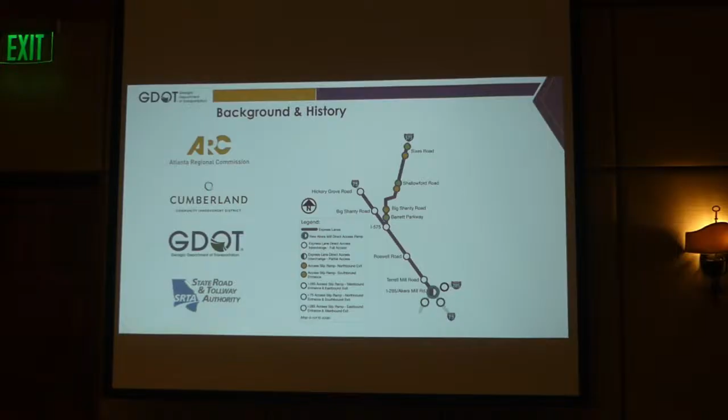This facility also included 2 express lanes on the west side of the existing lanes along I-75 between I-285 and I-575. And although the Northwest Corridor provided an alternative paid access route along the north side of Atlanta, there was no connection to the Cumberland CID area. And the Cumberland CID, as many of you probably know, serves as a major commercial activity center. It's one of the largest employment centers in the state, and it's home to major entertainment venues such as the Atlanta Braves Stadium and mixed-use area, as well as Cumberland Mall.

And so this connection was something that was desired, and so the Atlanta Regional Commission, Cumberland CID, GDOT, SRTA, and others pooled funds together to fund the Akers Mill project, which started in October of 2021. The project was completed as a design bid build through the Office of Program Delivery with GDOT District 7 leading the charge of overseeing construction throughout the duration of the project.

In this slide, I'm going to provide a little bit more info on our reversible express lane system, which, as you know, are toll lanes where the direction of traffic can be flipped to help manage congestion and increase capacity. While the direction of travel is typically set based on peak commuting hours, the direction can also be changed to assist with traffic flow for major events, incidents, or hurricane evacuations to ensure the lanes flow in the direction with the greatest travel demand. So lane reversals are performed by our TMC operators using our ATMS software, as well as with our HERO operators supporting from the field.

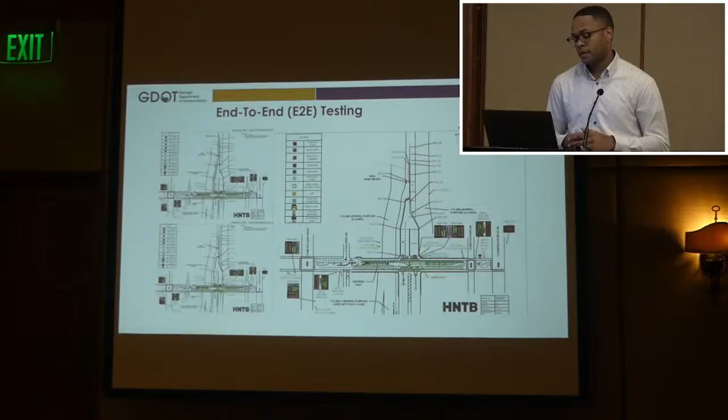All right, so kind of transitioning, I'll be handing it back to Christina in a little bit. But with this project being such an impact to the public, we wanted to make sure we were on the forefront of communications and outreach. So HNTB has a communications team that works on a lot of P3 and MMIP projects. So we employed their skill set, and we had them develop some FAQ sheets. We had them develop some social media blasts and some graphics. And we made the news, which I'll show in a subsequent slide here in a minute. Hopefully this will play.

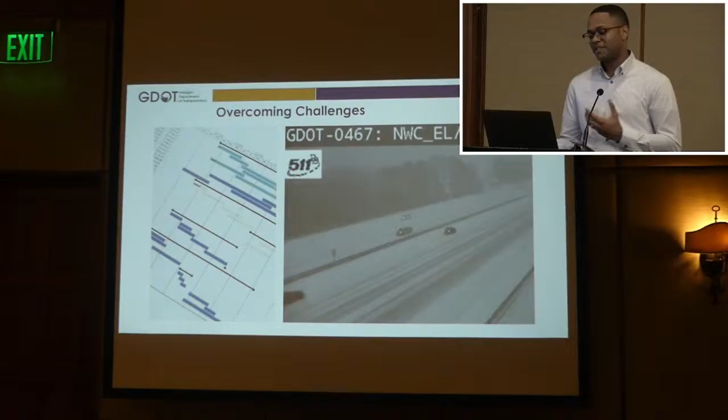This next screenshot is a screenshot from a CCTV stream. We were actually scheduled to do end-to-end testing this day. I thought we could do it. Personally, I thought we could push forward, but nobody agreed with me, and we had to cancel end-to-end testing. No, I'm just kidding.

Obviously, we wanted to make sure everybody was safe. So we did cancel end-to-end testing due to a snow event. And so we ended up having to pivot our schedule because end-to-end testing was critical before opening the ramp to the public. So we had some snow days, and we had to pivot a little bit to make sure everything was done safely.

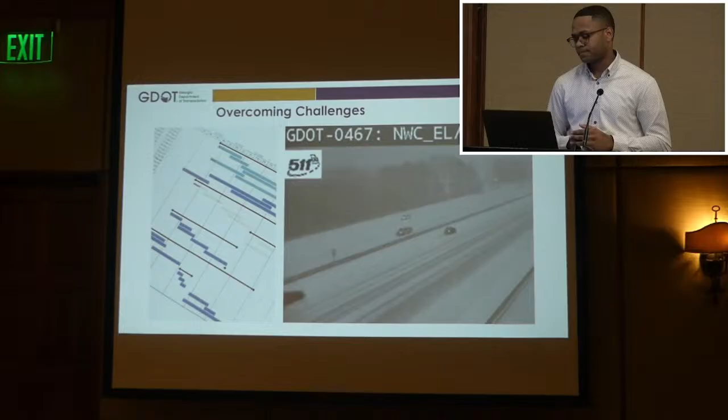So as I go to the next slide, the saying, "It's a wrap," well, we say it's a ramp. I didn't know if that would be funny or not, so tough crowd, I guess, but all good. But it's a ramp. That's what it boiled down to. We worked tirelessly for several months, and there were even folks that predated my involvement on this project that worked for years and years to realize this project.

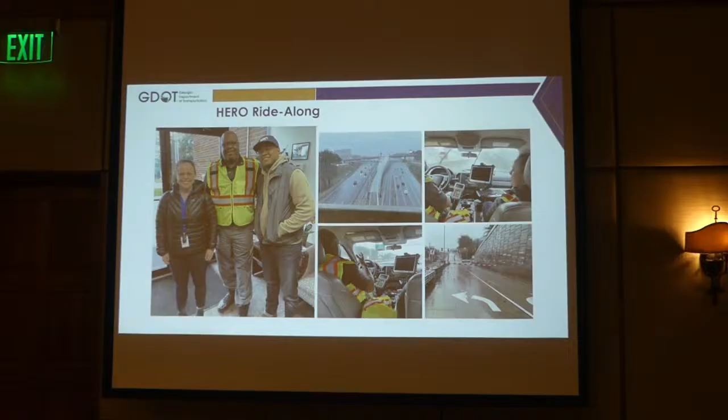And then when we started the transition, everything went smoothly, so there was no cranking gates or anything like that in the field, and so it was a very smooth transition. We were happy for that, and we were able to see the Northwest Corridor Express Lane southbound to northbound transition in action from the Hero driver's perspective.

Is this going to come up? Okay. Well, we did have a dashboard to show you. Can we get it? Okay.

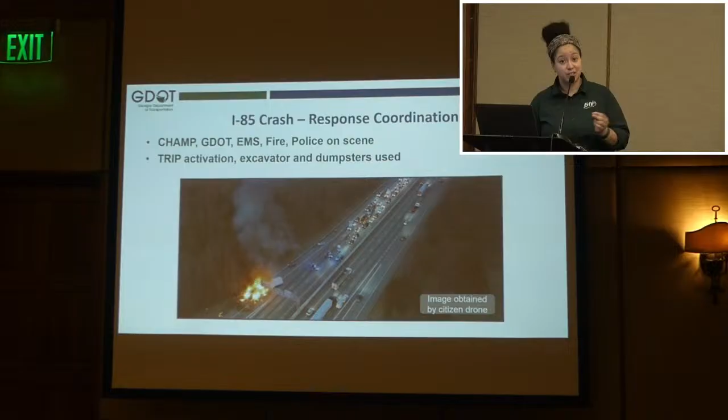This right here is an image actually obtained from a citizen drone. So someone saw some smoke, decided to fly up a drone and captured this image. And just with a quick caption, we're going to show that we had CHAMP, GDOT, emergency medical services, as well as our fire trucks and our police on scene. There was also a TRIP activation, and an excavator and dumpsters were used.

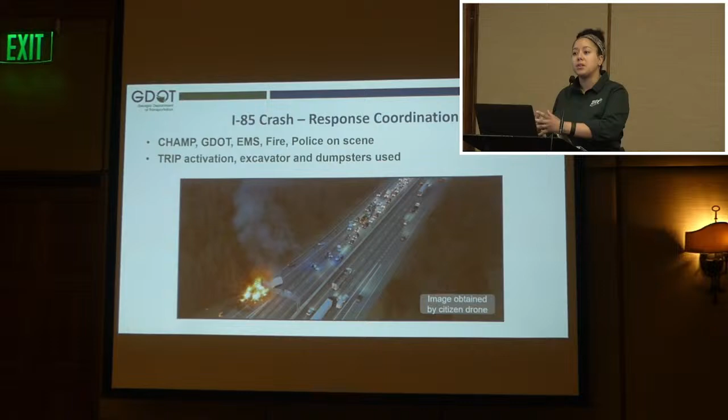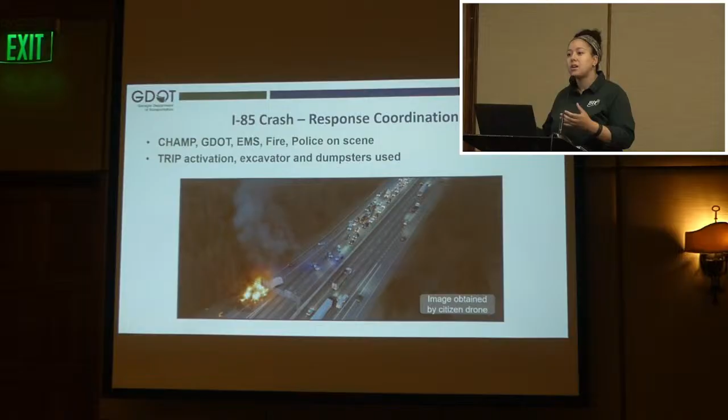Now, the interesting thing about this wasn't the tractor-trailer fire, because we know that that typically happens. It was the sign gantry that was burning underneath it. So once responders arrived on scene and they saw the fire burning, the question was, is this sign gantry stable? Is it safe for vehicles to pass through it? And that's ultimately what caused a bit of our communication snafu. You know, how are we going to get the sign gantry down?

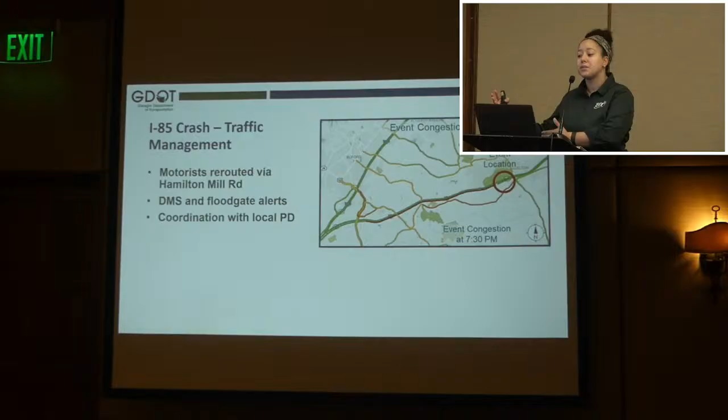As you guys can see, this is an image from RITIS. We're using our trend maps, and the event was captured at 7:30 p.m., so right as those lanes were being closed. Another thing that we gather is our RITIS crash performance metrics. Now for this, the roadway is closed, so it's kind of tricky. Whenever you have a roadway that's closed, only 2 or 3 vehicles can go through, so it might say something incredibly high if somebody's at the scene.

So sometimes we can see irregularities with RITIS, but overall, from that 6 to 8 period, it would take you over 4 hours to get through that area. But the roads were closed for an extended amount of time because we had such an intense situation. So I wanted to just make sure that I showed that. And that was our dog food incident. Now let's move on to our next crash.

We had a very interesting emergency landing of a small plane. Now, here's the story. We had a pilot in training that was flying up for the very first time, had their instructor in the back seat. They're doing their loops, they're cruising, having a good time. All of a sudden, their engine goes out and they're panicking. And they're like, what do I do? So the instructor behind him is like, calm down, don't panic, don't panic. Try and radio out to a radio tower.

No response. Said, all right, well, this is gonna be an interesting learning experience. We're gonna have to land this plane. And that's what they did. So on the way down, this plane clips into a tractor trailer. The wing gets stuck. And then they have to slow down so that they can unjam from the tractor trailer. And then whoosh, they land right on 985. I'm so excited. They land right on 985. No injuries, just some complaints of sore knees. But now we have a problem. We've got a plane on the highway.

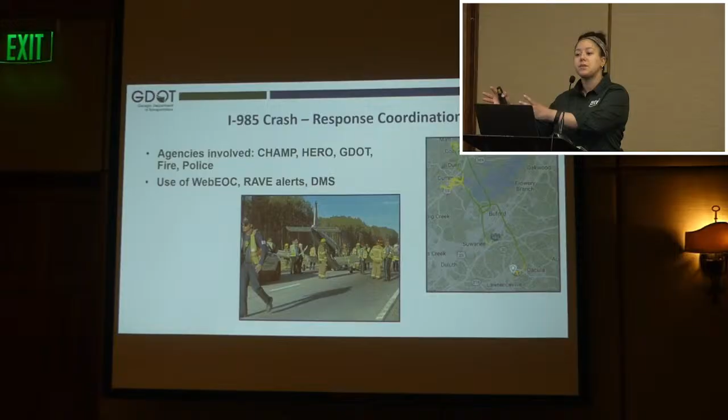We've got a couple of images from response. We had CHAMP and HERO working together. CHAMP provided advanced warning. So imagine that you're coming up to the crash, you see a CHAMP vehicle that says, hey, got a big crash, all lanes blocked, might want a detour. That's a great way that CHAMP helps, just really smooth out that traffic. We also used WebEOC. We used our Rave alerts, and we used our dynamic message signs to let everybody know, hey, there's a pretty big event going on.

In that right corner, they were actually able to share the flight path with us from the plane. So you can see where they started and where they ended. So they took a couple of loops, and you can see, I wouldn't say the panic. You can't see panic, but I was imagining a little bit of panic. I would be panicked in that situation. I know you guys would too.

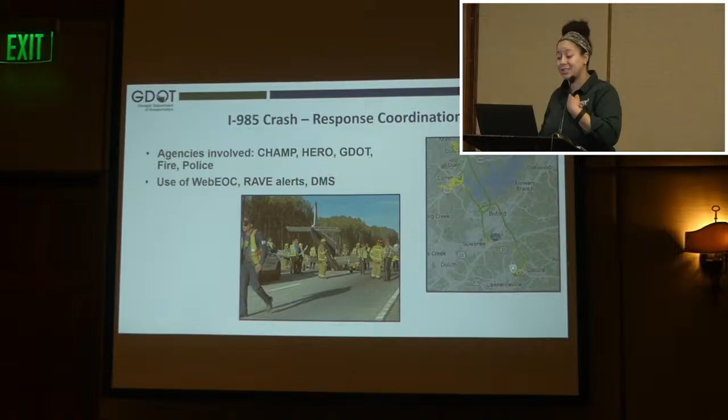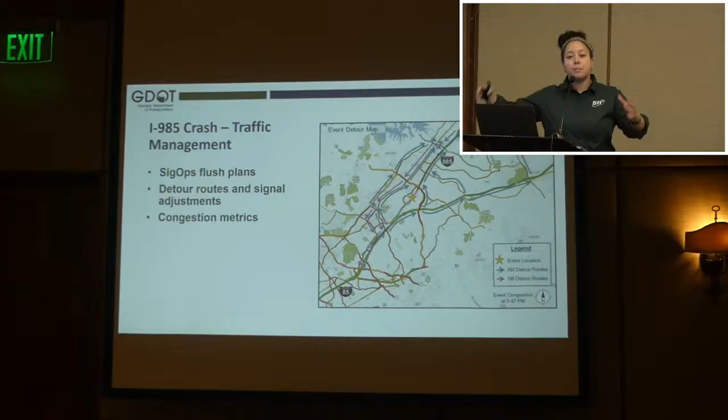All right, this is a very fun diagram that I created as we had to do detour routes for both northbound and southbound routes, and we cooperated with SIGOPS. We're able to say, hey guys, we got a little bit of a snafu going on here. You guys help us out. We're able to detour those routes and get signal adjustments so that we can get people to where they needed to go. We also provided some congestion metrics.

As we can see on RITIS, because there's so few vehicles going through those lanes, we don't have the most accurate data, but travel times were definitely a lot higher than they should have been. One thing that we use RITIS for is our delay costs. So imagine that everybody that's in traffic at that time gets assigned a dollar value amount to their time. Whenever we take their delay and time, we can make an estimate of how many thousands of dollars an incident would cause as a holdup. Not saying that this many people had to hold up, but overall 10,000 person hours of delay with everybody just coming through since 985, and the area is such a big area and a 6.2 mile bottleneck.

So I reviewed the crashes. Let's go into those after action reviews. Oh, do you mind if I open up that PDF? All right. Where do we have it at? Boom, thank you so much.

I wanted to share with you guys just an overview of what our after action report looks like. So we're able to see that we've got just our general information. We always start with a write-up of the area, our event statistics. So we'll provide just a review. And in the after action review meetings, I actually read this out to our stakeholders, police or fire, because the after action review meeting may take place a week or so after the original event, it's good to just catch them up on what happened.

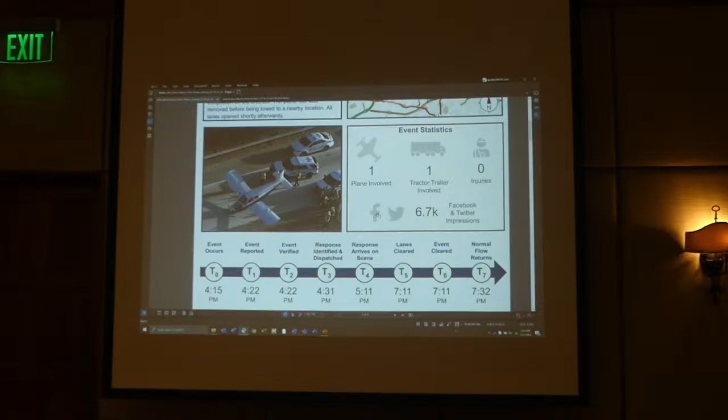Again, we've got our FHWA timeline, and then over here we've got sort of an event details of what took place. So we take our event details from ATMS and we kind of type them up into a more digestible format so that first responders or people that are on the scene are interested and they can find out that information. But it also helps us kind of see, where did we have any barriers in communication? Where could we improve? So always good to provide that.

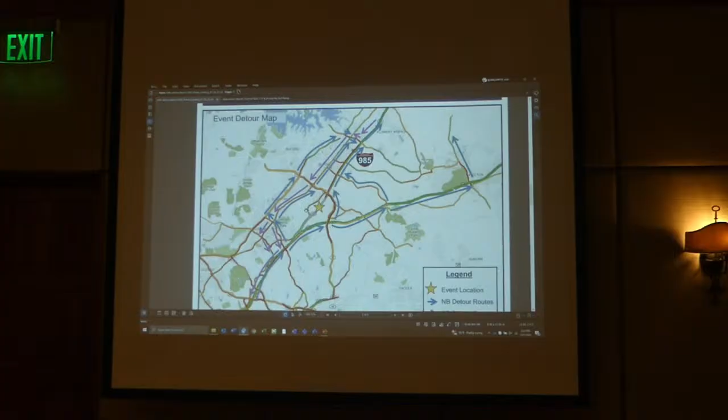Going into our SIGOPS involvement, this very nice colorful map. And we went into the traffic signals that were managed. So we had State Route 20, Buford Drive, State Route 347, Friendship Road, State Route 13, Buford Highway, State Route 211, Georgia Highway 211. Just a good amount of signals.

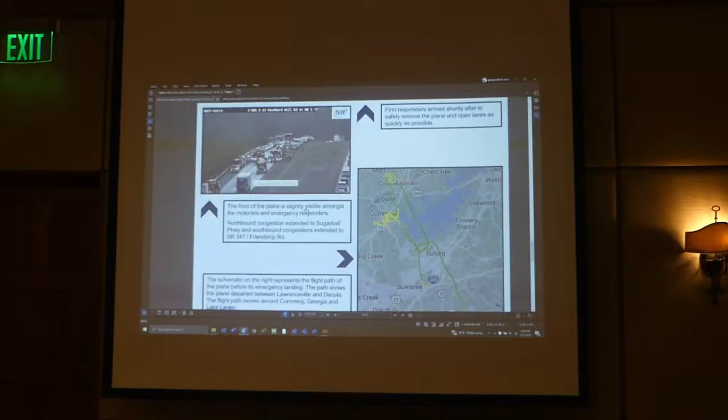And then for this event, we had so many additional details, which I'm always here for the additional images, because I feel like it tells such a great story. So we've got some images from the 511 CCTVs, we've got that flight pattern, and then our performance results as we go into the bottom. And we can see our bottleneck as well as our user delay cost.

So on an average Tuesday, it would be about $64,000 of delay. On the day of the event, it was about twice as many, so $118,000 of delay. And again, that's not saying how much it costs, but if you put a dollar amount to everybody that was in traffic.

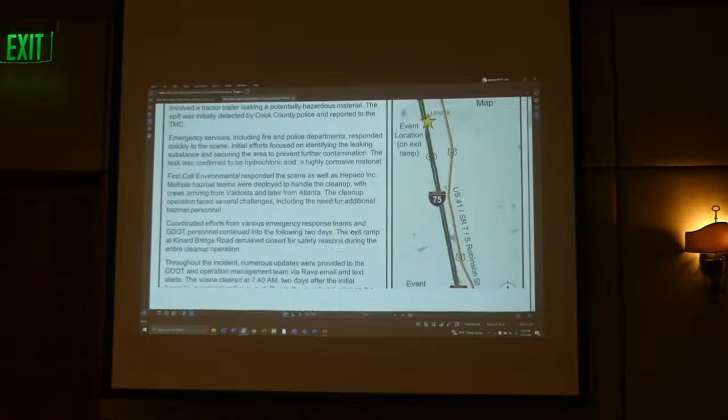Nowadays, our after-action reports have taken a little bit of a facelift, so I wanted to share with you guys this one, a hazmat spill. We follow the same format where we provide the map and overall review of everything. For this, it was one tractor trailer. We had a lot of hazardous materials spilled, and it was hydrochloric acid. We provide our notification timeline. This spanned over several days.

We had just as much detail as we can get. One of the things that was critical for this after-action review was that, hey, the environmental company that we called was a very long distance away from where the incident was, 213 miles, actually, from the area. And then for this one, we provided an additional timeline. Hey, hazmat took a while to get on scene.

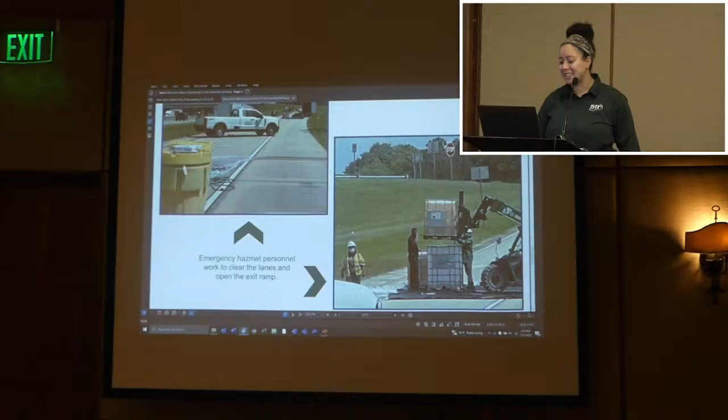And then for our additional event images, we had some images of the hazardous materials that were in the tractor trailer. Now in this specific incident, there were pallets of a liquid that when leaked out, they vaporized and turned into an airborne kind of irritant. So that was interesting. And we can see, we're clearly missing a little bit of PPE from this person over here standing right next to it, as you guys can see. But this is what I wanted to show you guys.

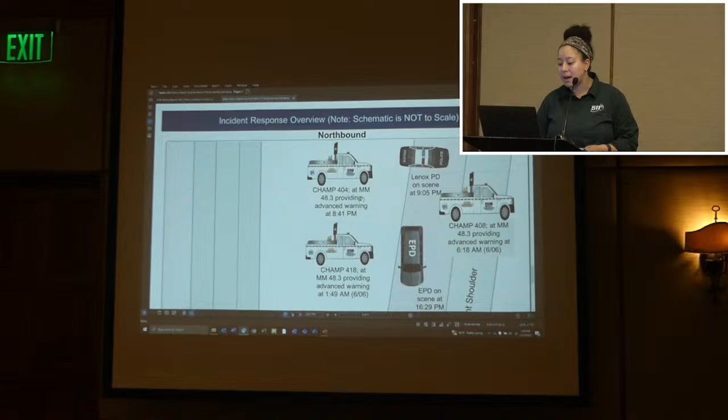We have a schematic that we started adding just to kind of detail how we would like for these events to be shown. So we've got on the right shoulder our tractor trailer. We can also see EMA and EPD on scene, as well as our local police, and we've got several CHAMP units on scene, as well as our hazmat materials. I think having a visual representation of who's on scene is a great addition to our after-action reports and really helps put a picture to words of who was on scene, as well as timestamps. Now with that, I will go ahead and get back into our lessons learned.

All right, communication and event management. Christina said it best. Collaboration is key and no such thing as over-communicating. Importance is placed on our early alerts, so RAVE and Web EOC. Also having those real-time updates to stakeholders, because as the event's going on, they're likely getting a lot of questions too. Making sure that we coordinate across jurisdictions is one of the biggest things that we drive through in our after-action reports, especially with local police. So we try and educate them on how this is the best way to communicate.

Did we hit a sign, or was it a sign gantry? Details like that. Also, utilizing CHAMP and HERO for that rapid response. Use of TRIP and heavy equipment to clear the scene quicker. Fuel offloading and aircraft towing. And then, again, collaboration with those local agencies.

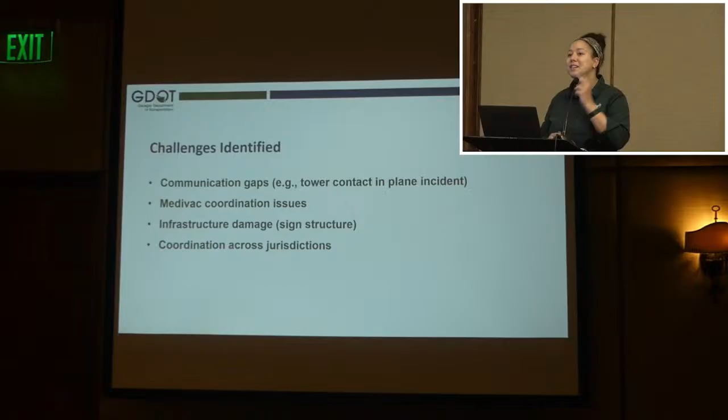Some of our challenges that we have is communication gaps, as we mentioned. Medevac coordination issues. Sometimes life flight, to save people's lives, they need to land a plane or a helicopter on the roadway, and they need the lanes to be clear enough so that they can land. Infrastructure damage and the extent, as well as just, again, coordination across jurisdictions. I put it in here twice because I wanted to drive it through. And our overall summary, our after-action reports are one of our critical tools for continuous improvement.

Scalability to other regions and incident types is critical. It doesn't matter if it's a small incident or a big one. The more that we have these conversations, the better we can get these lanes open quicker. And then just integration with smart traffic systems. As we start to have new technologies, we're working our best to use them, and again, to keep our roadways clear and keep traffic moving.

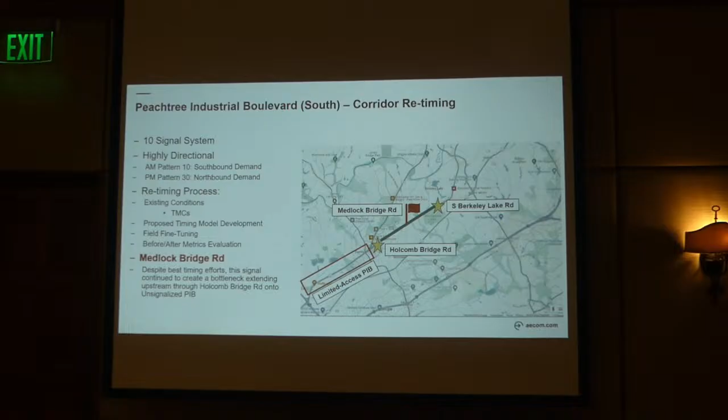But like I mentioned earlier, this runs adjacent to I-85, and so it's a hot spot for detour demand. Anybody looking to avoid Spaghetti Junction might opt to get off of 285 early and take PIB instead. So step by step of the bottleneck, I'm sure y'all are all familiar with how these occur, but overcapacity approach northbound at Medlock Bridge leads to queue spillback. Our next signal there is Tech Parkway.

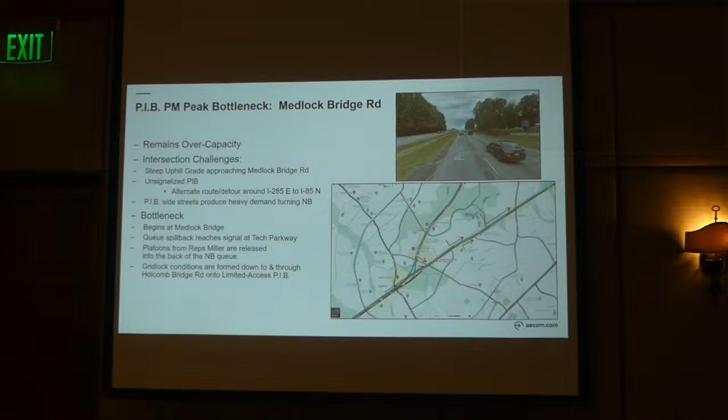And then once the spillback reaches that point, the platoons that start at our third signal down, which is Reps Miller, don't have any storage space to move into, so they kind of slam into the back of the queues at Tech Park. And from there, yeah, the gridlock conditions are starting to form, and we see a lot of blocking the box, the one thing I think every driver hates the most.

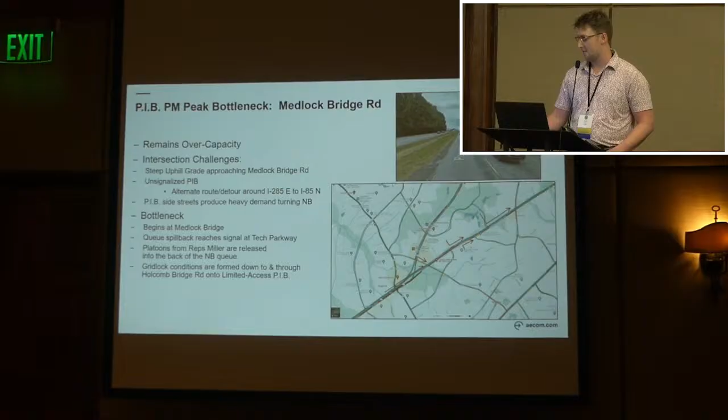So here, bottleneck management, standard things that we might do for a more simple bottleneck is create alternate plans. So this can be programmed in the time of day scheduler. If you can count on traffic picking up 4:30 to 5:30 p.m., you can create a copy of that PM peak pattern with adjusted splits, maybe add 10 seconds or so to that main line, the approach that's experiencing the bottleneck.

But those TODs, they're preset, they're not flexible, so you might have some days where traffic picks up earlier at 4 p.m., might stretch later till 6 p.m., and so it's definitely not the best way to handle bottlenecks. So better than a pre-programmed plan, we have our ROC staff at AECOM. We've got somebody on call during the week, 7 a.m. to 7 p.m., dealing with incidents.

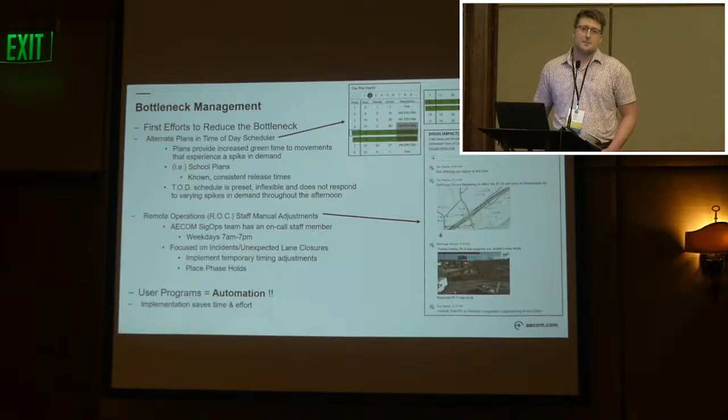Not all of them are as exciting as the ones Catherine mentioned, like the Mission Impossible plane landing or the dog food incident. But that is what our ROC staff is focused on, is those unexpected lane closures and making manual adjustments for that. We simply have too many bottlenecks in the Metro East region for one person to be manually adjusting timing at all the different locations. So that's where user logic comes into play. It allows for automation, which saves time and effort.

So here is our spotlight sentence. This is for your PDHs. If you remember nothing else from the presentation, I'm pretty proud of this sentence. I wrote it myself, no ChatGPT. But user programs allow timing engineers to identify opportunities to automate the recurring real-time manual adjustments that are needed to reduce daily traffic delays at overcapacity intersections.

So through user programs, signals can automatically select traffic plans based on the parameters that we create. These signals actually end up responding to delays faster than a person can pick up on it. And overall, yeah, it just reduces the workload by the ROC staff. So in a nutshell, it's just advanced logic-based programming.

There's essentially two steps. First, you're establishing variables that are local to the controller. This can be that real-time detection data, which we'll talk about, as well as the status of a peered signal it's communicating with. And then after establishing all the variables, ultimately you just place pattern inputs for the signal to automatically select based on what's going on in the field.